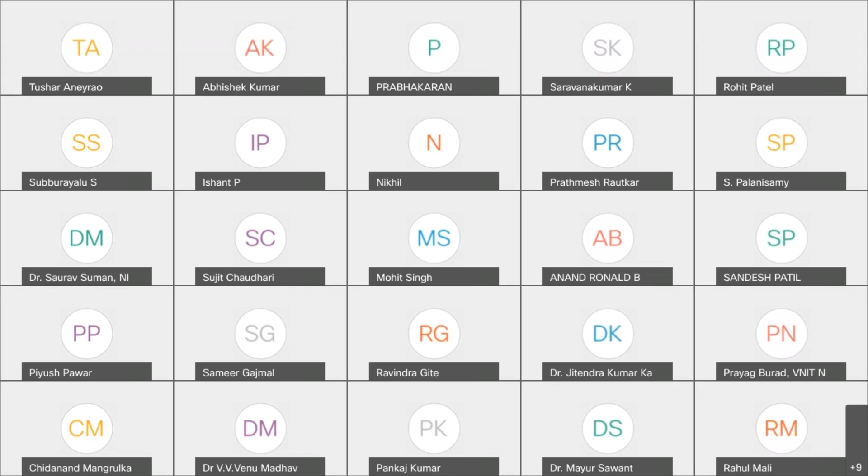Hello Rahul, I am audible. Yes sir. Actually, your voice is very low, so I thought that somebody is talking. Earlier, some voice was coming. Okay sir, so can I start? Yes sir, please sir. Okay, just give me 1 minute, I am sharing my slides. Yeah, my slides are visible to all of you. Yes sir, it is visible. And my voice is audible to all. Yes sir. Okay.

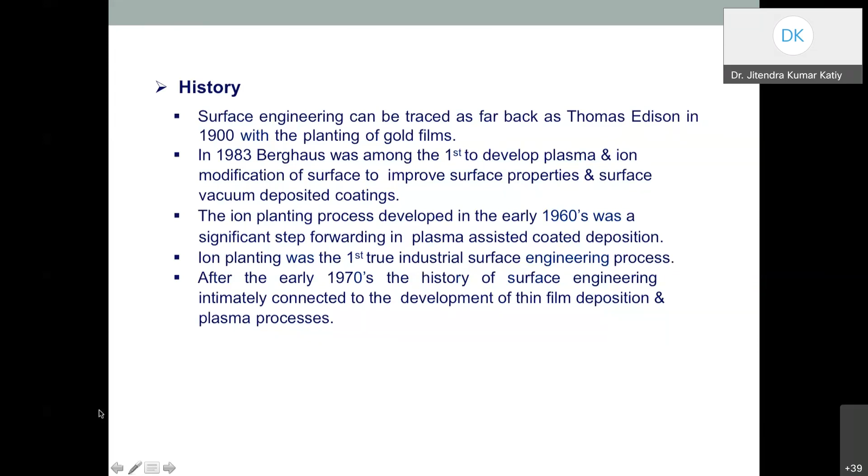This means when you do the painting on your door, what you will do first is coat the primer so that it can protect from corrosion, and then you can coat the paint. So the life of the paint will be increased after using the primer. That is also surface engineering—you have performed this in surface engineering.

So it is a sub-discipline of material science that deals with the surface of solid materials, and those solid materials compose the bulk material, and the surface is bound. This bulk material is called the surface phases. Different phases occur in that particular material.

Surface engineering means you alter the property of the surface in order to reduce the degradation over time. So it depends how you can perform it, like through heat treatment. You harden the surface, meaning you engineer it so that it will not degrade over a particular time period, improving its existence.

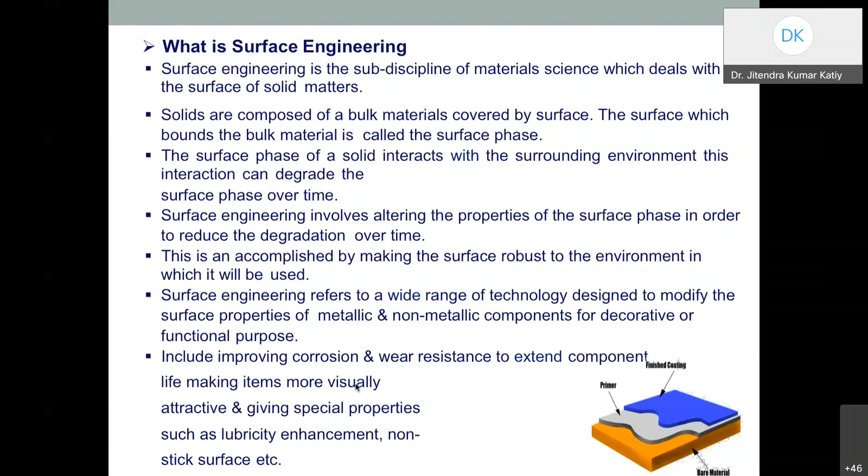Surface engineering refers to a wide range of technology designed to modify the surface property either by metallic means or non-metallic means on different components. Whatever the component—turbine blades, cutting tools, anything—surface engineering is important in all aspects. It improves corrosion resistance, wear resistance, life of the component, aesthetic appearance, and wettability. That's why surface engineering is important in all fields of mechanical engineering.

These are various examples of how we perform surface engineering, even metal additive manufacturing is a sub part of surface engineering. We coat a few microns of thickness over any component using a laser beam or electron beam as a source of energy to deposit material over the surface. If we use plasma, that's a plasma deposition process; if laser, a laser deposition process; if electron beam, an electron beam deposition process; or ion beam, an ion beam deposition process, which is used for nanoscale purposes. Here we work in combination with chemistry, physics, and mechanical engineering aspects, along with metallurgical or material science aspects.

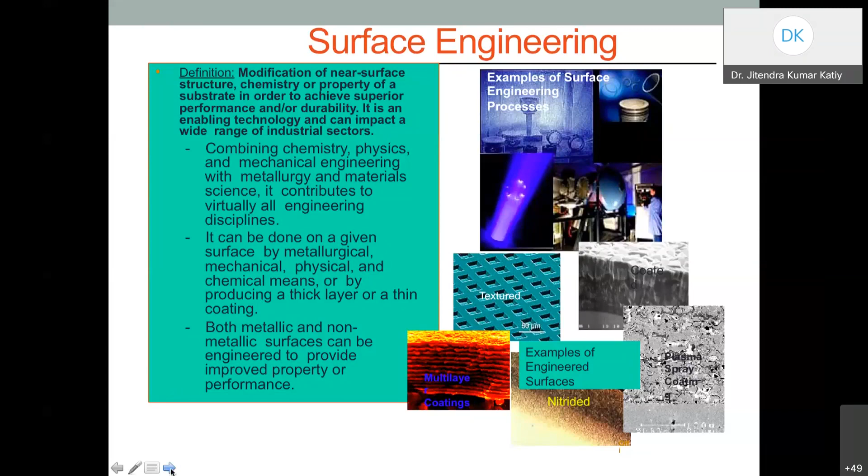Why is surface engineering important in manufacturing? An engineering component usually fails when its surface cannot adequately withstand external forces or the environment to which it is subjected. So the selection of surface material with appropriate thermal, optical, magnetic, or electrical properties and sufficient resistance to wear, corrosion, and degradation is crucial to its functionality. This may not be possible with the base material alone, so we perform surface engineering by surface coating, either by additive means or otherwise.

Additive is nothing but when you add something to the surface. Surface engineering provides additional functionality to the solid surface, covering all these aspects with the help of coating, or sometimes you functionalize and activate the surface, and also perform plasma treatment over the surface. That's why surface engineering is important to improve wear resistance, corrosion resistance, degradation property, electrical property, magnetic property, optical property, and thermal property.

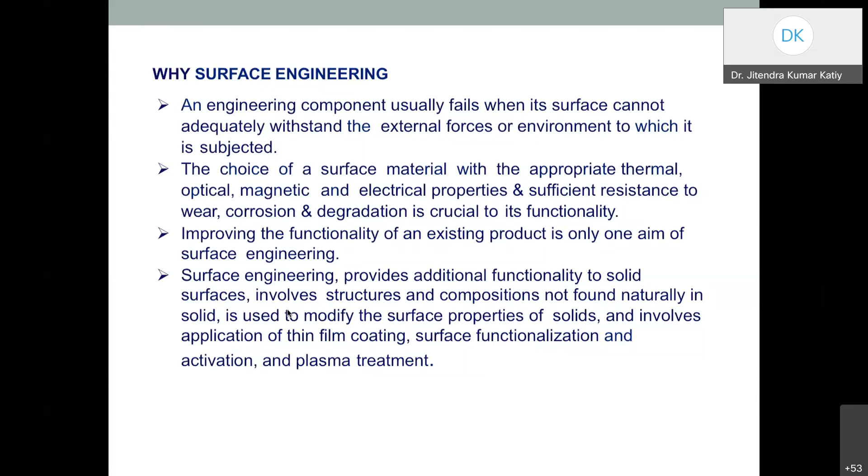So what are the benefits of the surface engineering we are using? The benefits are we can improve their frictional resistance property, wear resistance property, fatigue property, corrosive property, reflectivity, emissivity of any surface. When we do additive manufacturing, emissivity of the material is very, very important, so it should not be more, it should not be low. Also thermal and electrical conductivity, biocompatibility.

So when we use this surface engineering, we can improve the life of the component, improve wear resistance, oxidation resistance, corrosion resistance, improve their solderability, improve their electrical conductivity, improve their durability, so that we can produce very less waste. And surface engineered automotive parts and components can extend the warranty and reduce the emissions.

So we can also coat surface engineered valves, so they can withstand for 5 to 10 years without replacement.

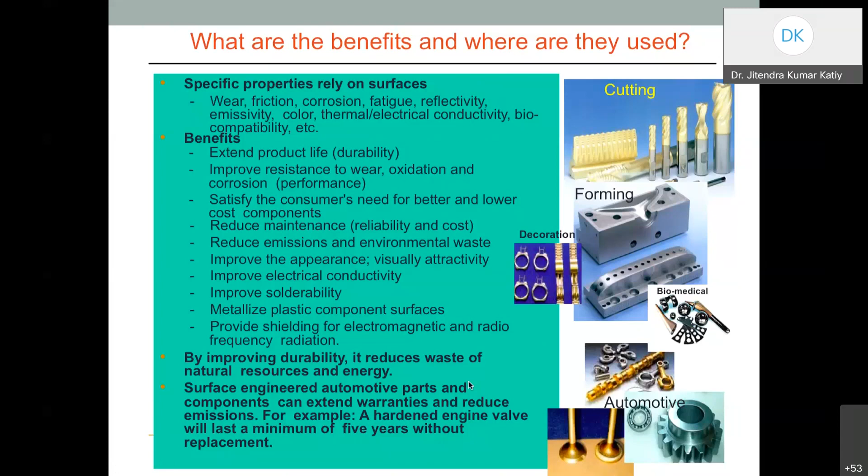So it is a very wide scope in the mechanical field. So how do you choose the correct things?

So first we identify the failure of an engineering component - when its surface cannot adequately withstand the external forces. And what is the environmental condition in which that particular component is used? And what are the loads that component occurs? So due to which type of failure is observed over the component. So first thing, you identify the failure mechanism.

Then only choose the correct surface engineering method. Then, what type of external forces - thermal, optical, magnetic forces, thermal forces, optical forces, electrical forces - these are the external forces. Sometimes it requires surface modification, sometimes we don't require further modification.

Then we can modify the surface with some other means, like we just do PVD coating, physical vapor deposition, or chemical vapor deposition.

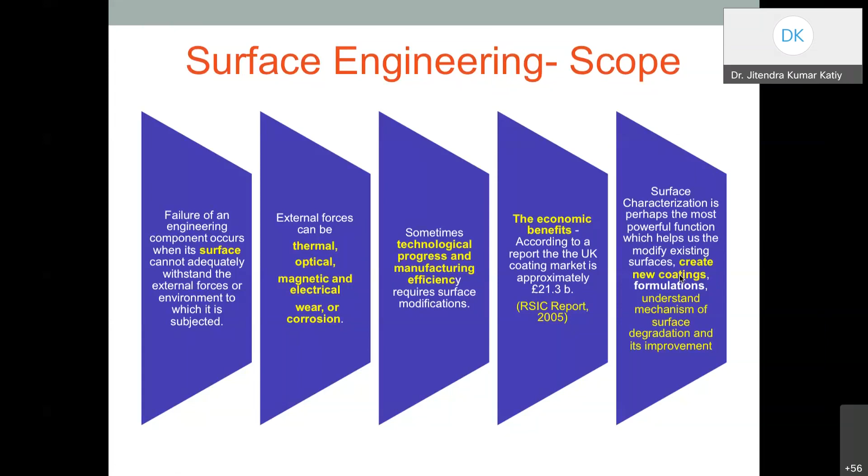So surface modification is done without changing the material chemically. That is very important - we are not disturbing the chemical, meaning the substrate. We are not disturbing the material property of the substrate. We are only altering the top surface of the substrate.

So there are three types of processes which we use: thermal processes. In thermal process, we can go for the surface heat treatment process.

So we can go for surface heat treatment processes like hardening, nitriding - those are one process. And when we talk about steel or cast iron alloy, low carbon alloy, we want to harden the surface by laser cladding, by laser flames, or induction. So if we are using laser as a source, then we can go for sub classifications such as laser cladding - that is also one type. Selective laser sintering. Like if you are using flame...

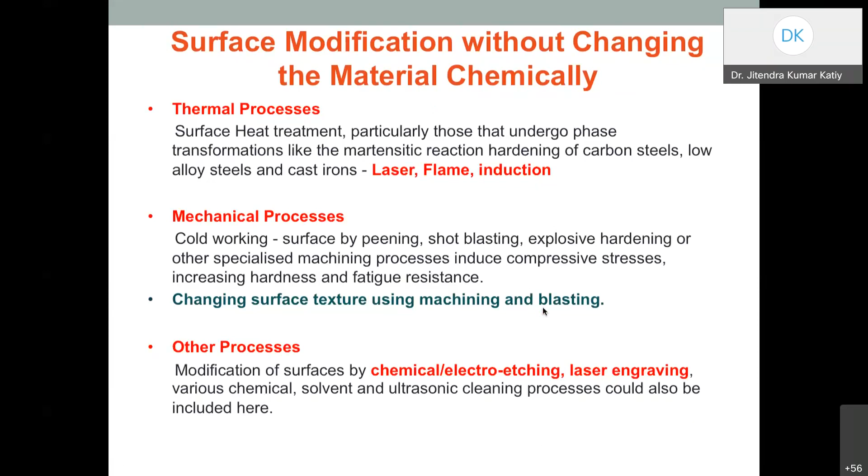Here we are not changing the material chemically - that is the important point in surface modification. So surface modification is achieved by changing the surface chemistry only. On top of the surface, we only play the role - we are not going inside; the substrate properties remain similar, but we change the surface property.

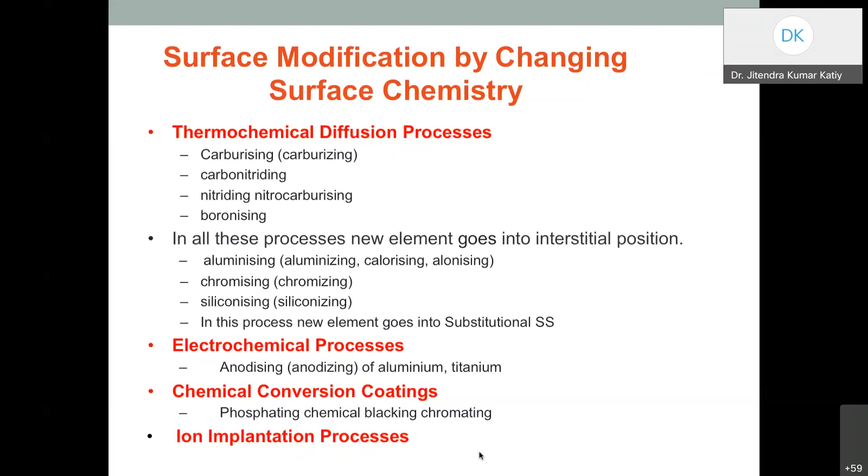Diffusing processes like carbonitriding, nitriding, boronizing, carburizing are various thermochemical processes. Other new elements go into the substitutional positions, like chromizing, siliconizing, and aluminizing. We impinge the foreign particle inside the material, which is also used in semiconductor applications when using interstitial positions. Electrochemical processes like anodizing of aluminum and titanium, chemical conversion coatings, phosphate, chemical blacking, chromating, and ion implantation are various methods used for surface modification by changing surface chemistry, not material chemistry.

In surface engineering, there are a few steps. First, surface modification is done without changing the material chemically. Surface modification is done by altering the surface chemistry only. And surface modification is done by adding new material onto the surface, such as coating, laser cladding, or additive manufacturing. You add material over the surface to improve properties like wear resistance, corrosion resistance, mechanical strength, and impact strength, for example on turbine shafts and blades. So these are the three basic phenomena used to perform surface engineering: adding new material, altering surface chemistry, or modifying without changing the material chemistry.

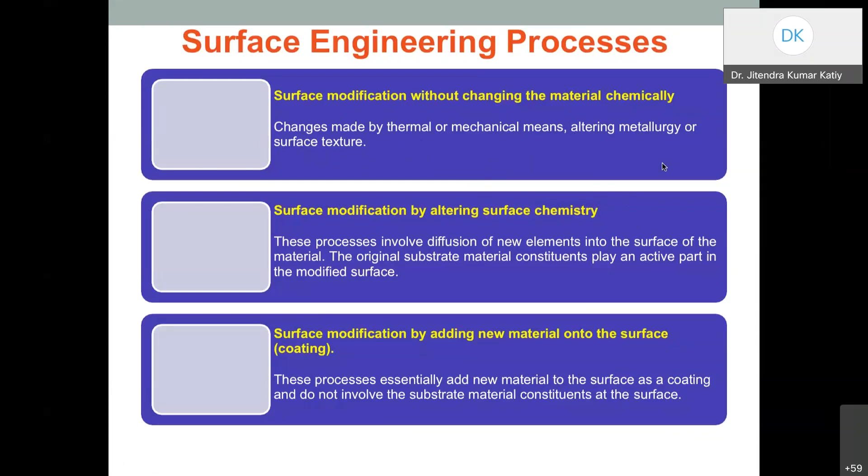Evolution and significance of surface engineering is very important nowadays, in architecture, coating aspects, automotive industries, gear industries, nanomaterials, nanotexturing, and nanostructure development.

Hello. Yeah. Okay, can you call me after one hour because I'm taking lunch? Okay, please call me after one hour.

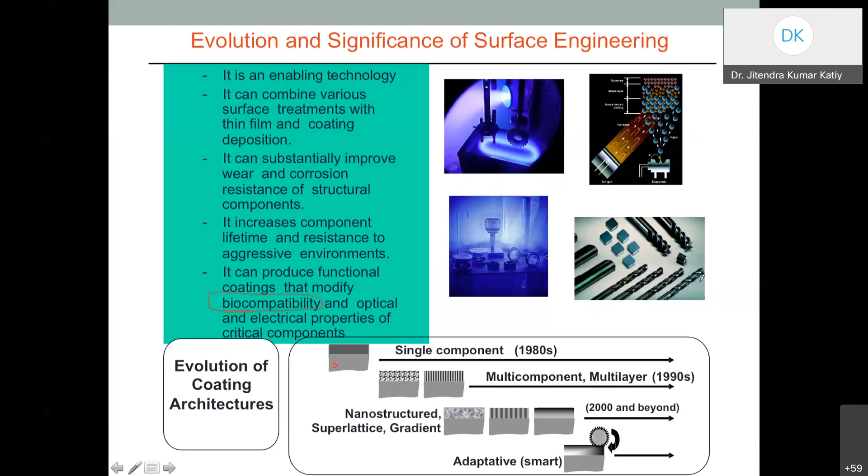So this is the basic overview of surface engineering. Either you can do coating or modify the surface, as per requirement. This is a very important slide to understand. What is the meaning of surface engineering? You can easily correlate it with research, as many researchers discuss their research in this context, and this slide gives you a basic understanding of that research very easily.

Here you can see surface modification. It can be done by thermal aspects only, using thermal energy for surface hardening processes, such as flame hardening, induction hardening, electron beam hardening, or laser beam hardening. Here we are focusing on thermal aspects, where temperature plays a very important role in modifying the surface.

Further, surface modification can involve both thermal and chemical aspects, where temperature and chemistry both play important roles. This includes diffusion of non-metallic elements like carburizing, nitriding, carbonitriding, and boriding, where carbides or nitrides are diffused over the surface to enhance hardness or corrosion resistance. Sometimes surface modification is done by mechanical means like shot peening, laser peening, or surface texturing to enhance hardness and fatigue properties. That is one part of surface engineering.

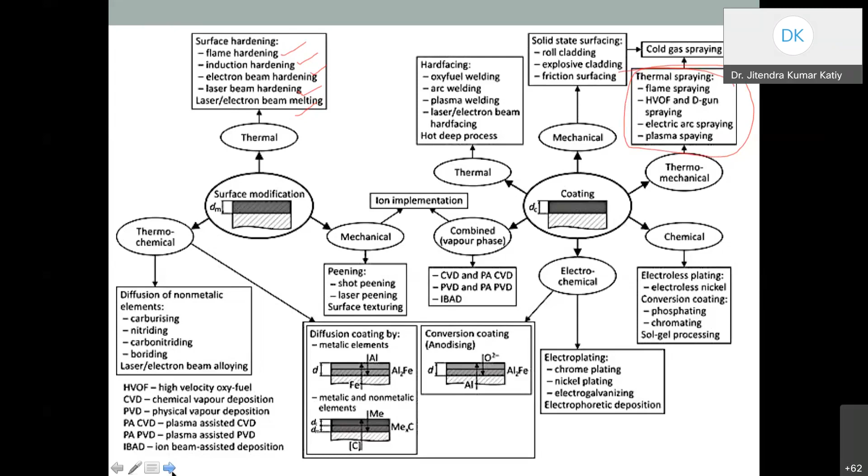So these are the different phenomena which we use to enhance the life of the component in terms of their wear resistance property, corrosive resistance property, durability, and mechanical property. That's why it is very, very important. So our main focus in additive manufacturing is to enhance the life using these processes. I hope everyone can correlate their research work, whatever you have listened to till today, with this slide.

So material property, as I told you, is very important. Bulk properties - strength, density, ductility - these do not change, but surface property plays a very important role. So hardness, friction, corrosion, oxidation - these are called surface properties. Bulk properties are strength, density, ductility - these are called the bulk mechanical material properties. Surface property means hardness, friction is a surface property.

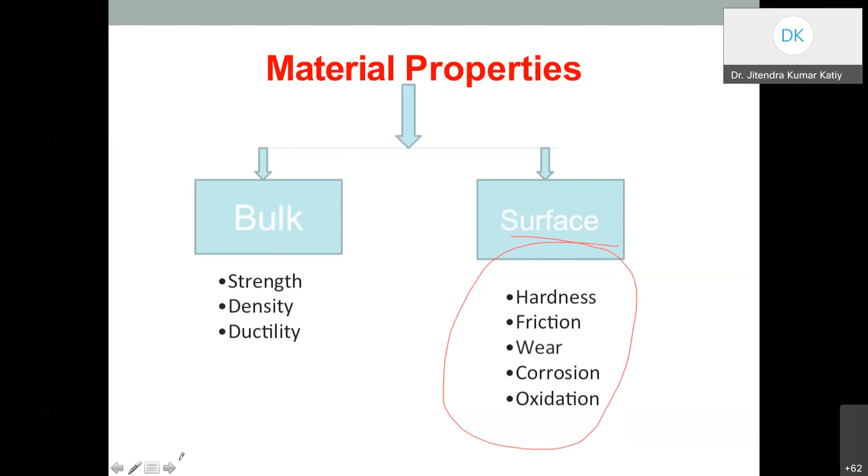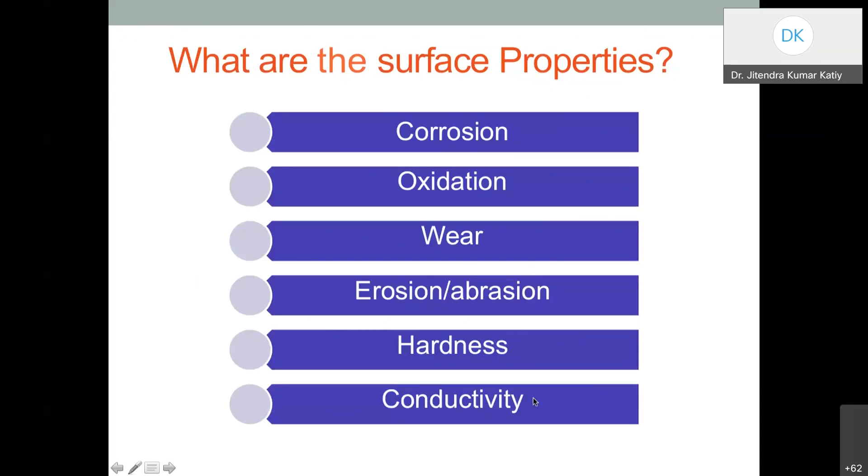Wear is also a surface property. Corrosion is a surface property. Oxidation is a surface property. So we are only playing with these surface properties to enhance the life of the component. So what are the surface properties - corrosion, oxidation, wear, erosion, hardness, conductivity, emissivity? These all are surface properties.

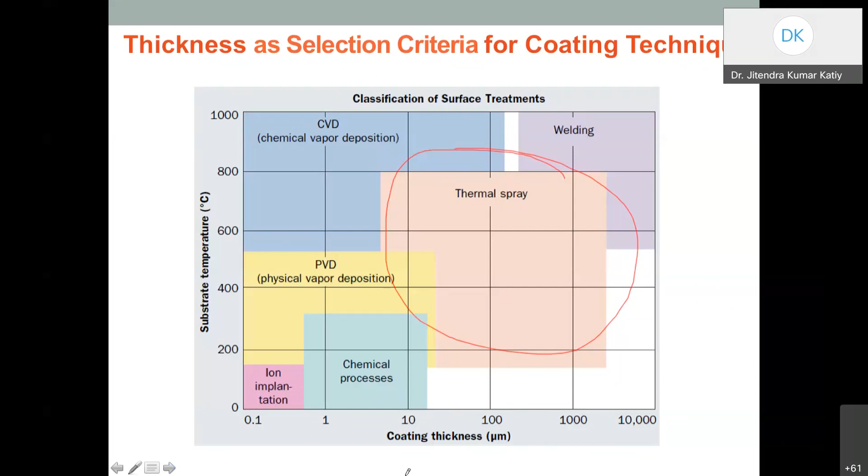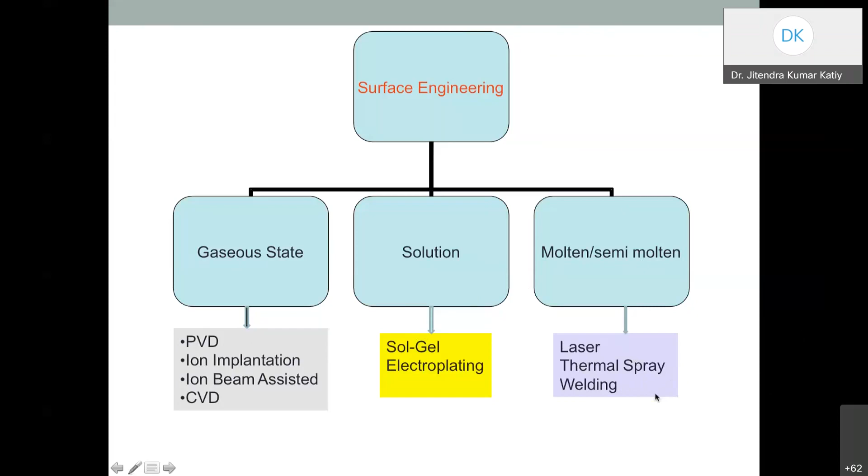So surface engineering gives you, we can either perform in the gaseous state, or in the solution state, or in the molten or semi-molten state. In the gaseous state, we work with physical vapor deposition and chemical vapor deposition, where material is evaporated and deposited onto the substrate. In the solution based approach, like sol gel or electroplating, we dip two rods - one which we want to coat and one which we want to evaporate the material from - and coating occurs. So we need the electrolytic solutions. For molten and semi-molten material, we need power - so laser, thermal spray, or welding. We just melt the material and that diffuses over the surface. So that is the molten or semi-molten state.

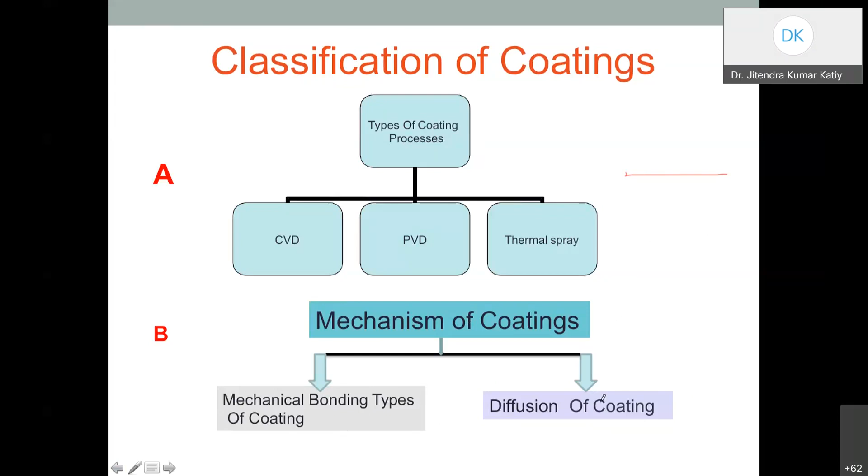So classification of coating is basically three types: chemical vapor deposition, physical vapor deposition, or thermal spray coating. The basic mechanism of the coating performed over any surface is either mechanical bonding with each other, or diffusion. So in laser cladding, what do you do? We diffuse the powder over the surface. Diffusion occurs due to the high temperature of the laser source, which diffuses the material into the substrate. If this is the substrate, the material is diffused into it and forms a coating. So these are the two mechanisms - either diffusion process or mechanical bonding process.

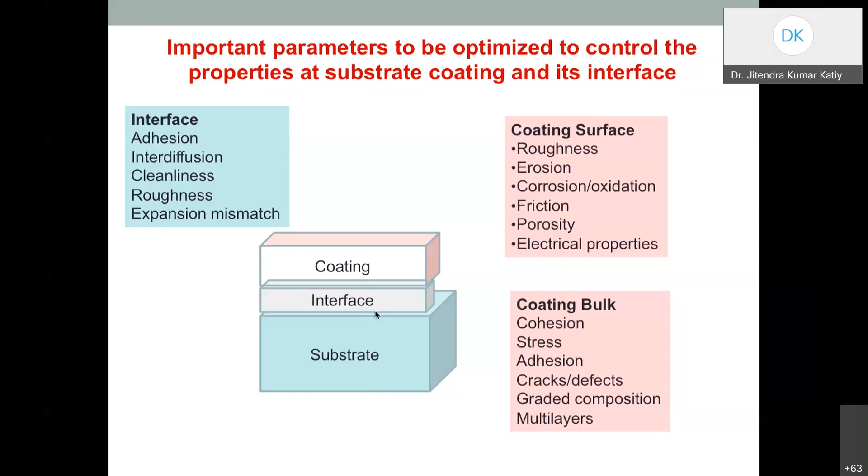It is very important to optimize these when you perform any type of surface engineering problem. The surface property improvement triangle consists of surface modification techniques, functional properties, and characterization. In this way, we can optimize the parameters by hit and trial method, and use the optimum parameters for particular applications.

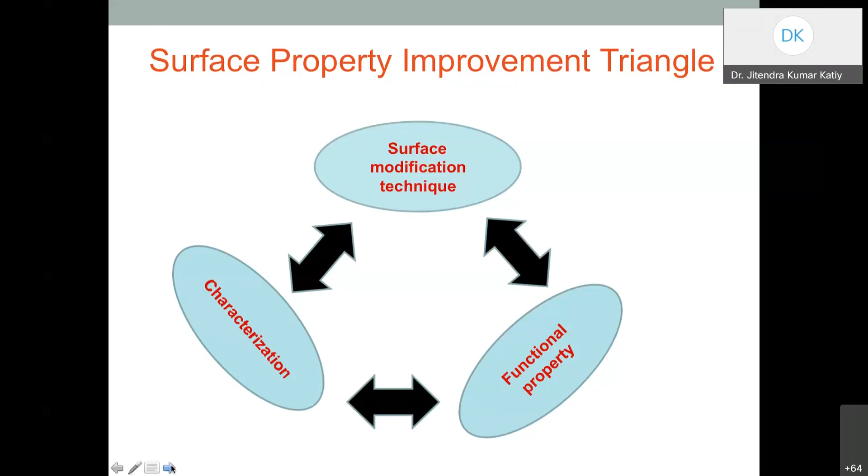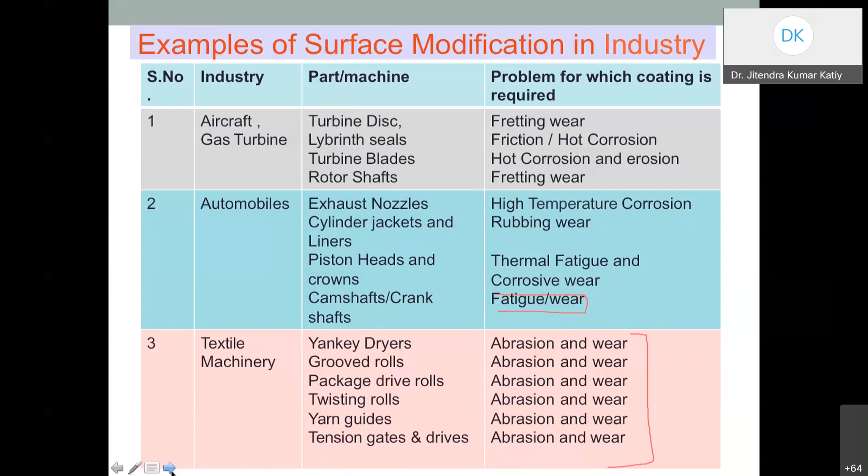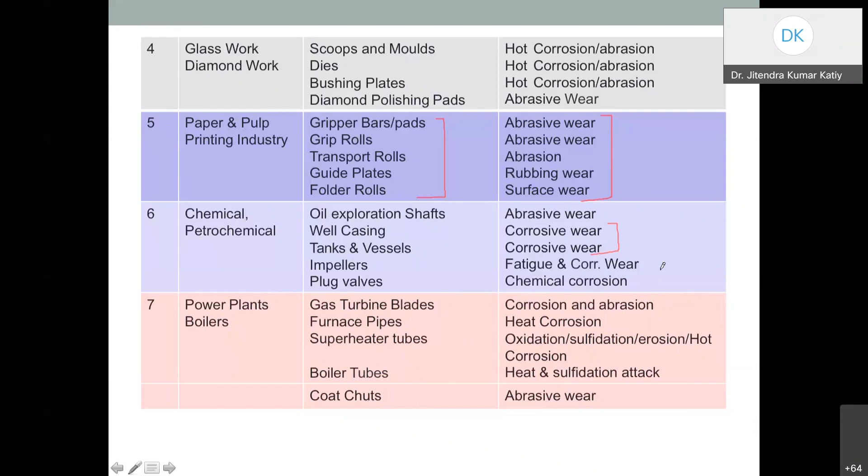So in all industries, surface engineering plays a very important role to reduce the maintenance cost of components. If a shutdown occurs even once, there is huge loss in that industry. That's why surface engineering, or additive manufacturing, is very important in these industries.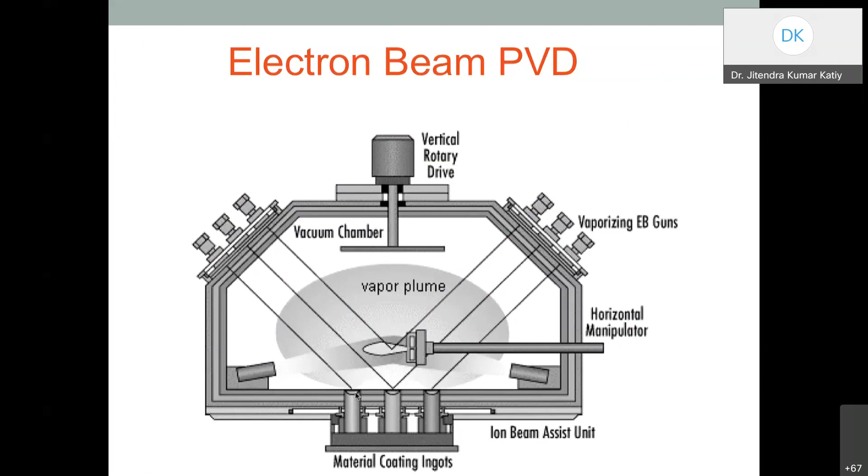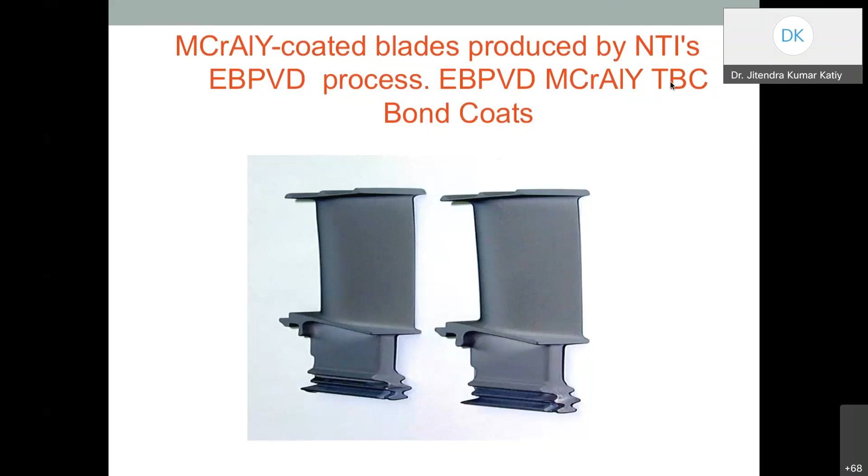Another type of coating very predominant in real estate is called hydrophobic coating. A beautiful example is the lotus leaf, where if you drop water on it, it rolls out. In real estate, there are multi-story buildings, and it's not possible to clean the glasses very frequently. So you coat the hydrophobic material over the glass, so that even dust particles roll out. This is known as the self-cleaning property.

So you are enhancing the self-cleaning property of any material. This is also used in textile industries, where they are working on self-cleaning cloths, so that dust particles will not stick to your cloth. That is also available in the market, but it is too costly. The dust particle will come and roll out. This is a very important research area where nowadays most researchers are focusing.

This can be performed either by plasma assisted chemical vapor deposition. Here you can see the example, the water forms at least a 150-degree angle. That is a super hydrophobic surface.

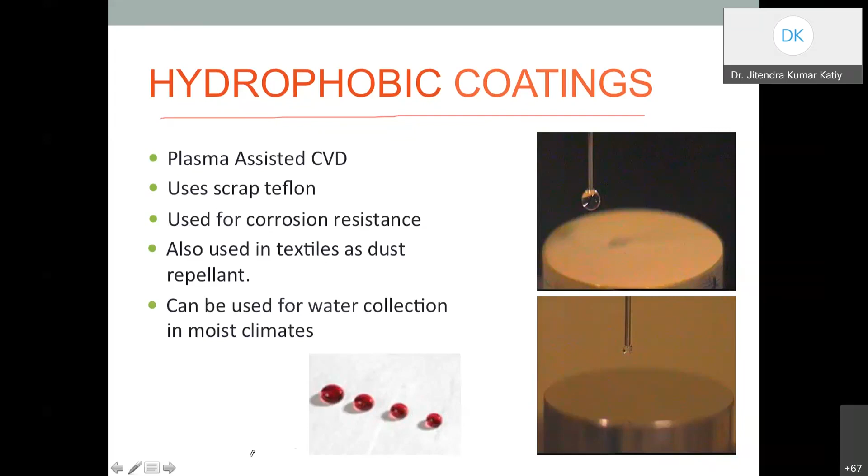Another kind of surface engineering is plasma etching. This process is performed on any substrate to improve their adhesive property. Plasma etching improves the adhesion property of any substrate, and it can cleanse and activate the surface and reduce toxic chemicals from the surface. One example is plasma etching of automotive parts, which can improve the paintability and service life of the component. It has wide applications on materials ranging from metal to polymer.

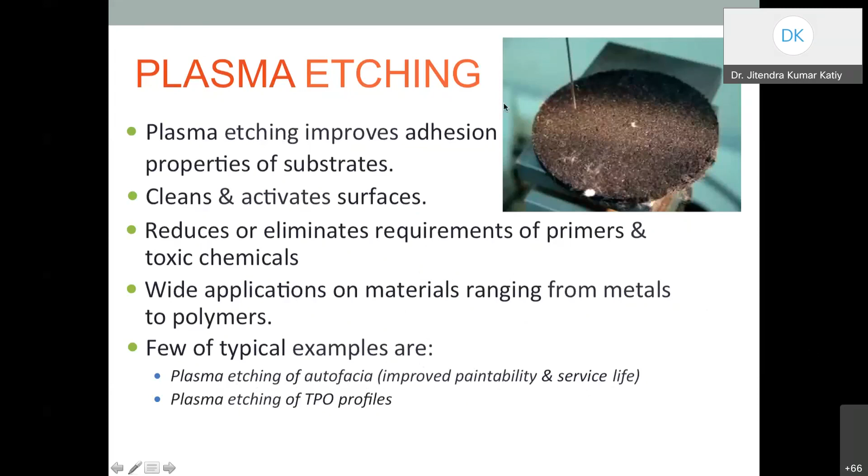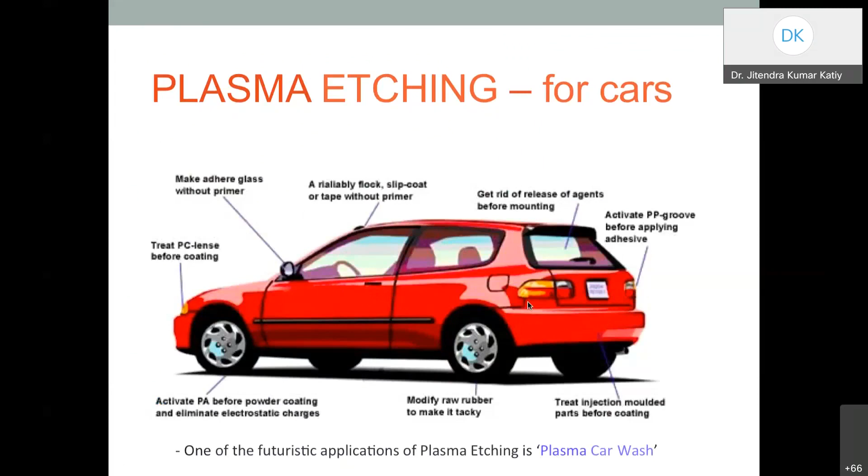For plasma etching of cars, your whole body goes inside the plasma, and you can clean the surface with the plasma etching process. You get a shiny surface after completing this chamber process. This is widely used in the automobile industry.

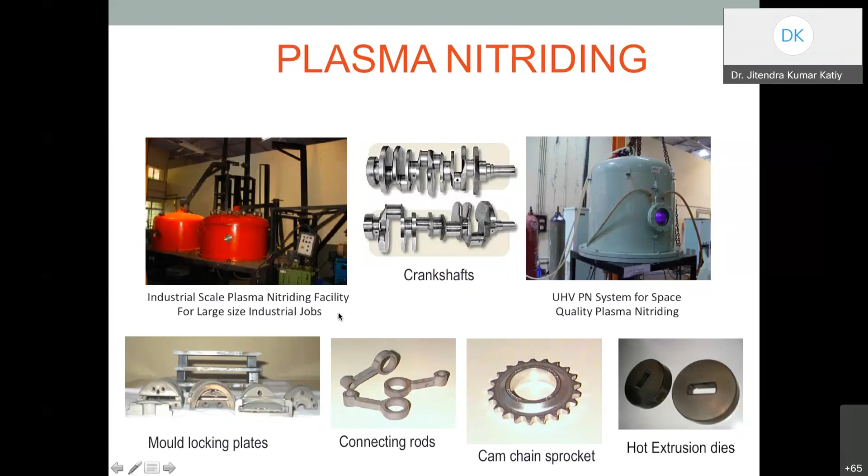Another kind of surface engineering process is plasma nitriding. Here you can see industrial scale plasma nitriding facilities, with very big vacuum chambers where we can coat the material in presence of plasma, which is the fourth state of matter. It can deposit over the surface to improve corrosive and wear properties. Applications include connecting rods, crankshafts, hot extrusion dies, and mold locking plates.

That is called the thermal or plasma spray process. Here you can provide a very thick coating, at least 20 microns, on a very large scale, in the form of alloy, ceramics, plastic, or composite, as per our application requirements.

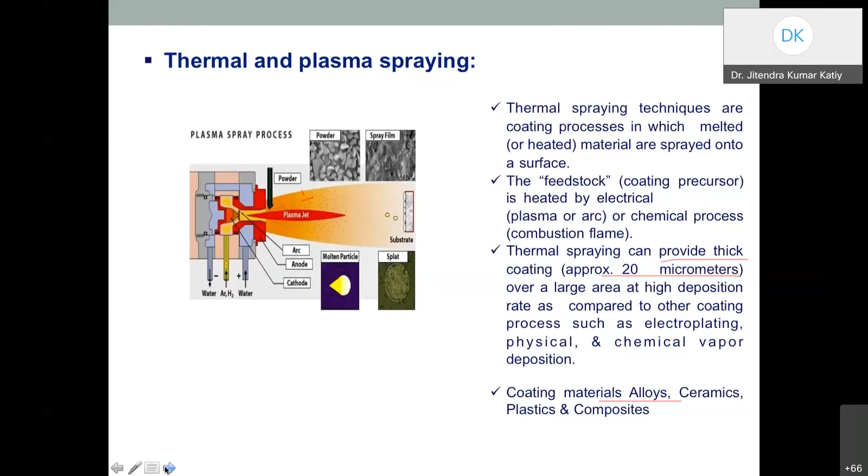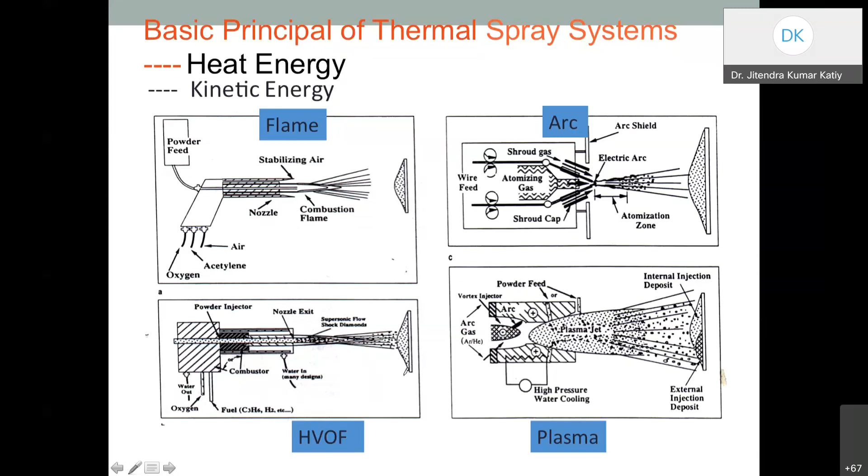Here we have the plasma jet with a powder feeder, and whatever gas comes out converts into the plasma jet and deposits over the surface. So in HVOF and other processes, the powder feeder is very important, with the nozzle and gas coming out. Laser cladding can also be performed by this process.

This is a comparison of various thermal spray processes as per our application requirements, so we can select the accurate process for various applications. Cold spray is also used nowadays to improve life, along with air plasma, vacuum plasma, and wire arc. This table is a well-established comparison between the different processes.

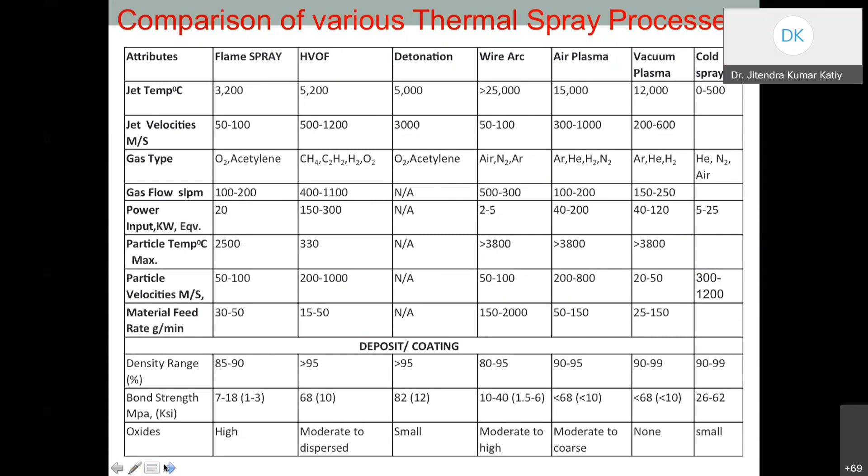When we move to advanced coating technologies, these are called nanoscale technologies, like physical vapor deposition, where you have the base material and the substrate material. Whichever substrate you want to coat, you keep it inside this crucible and heat it up. Due to the heat, the material converts into a molten stage and vaporizes, and it coats over the substrate.

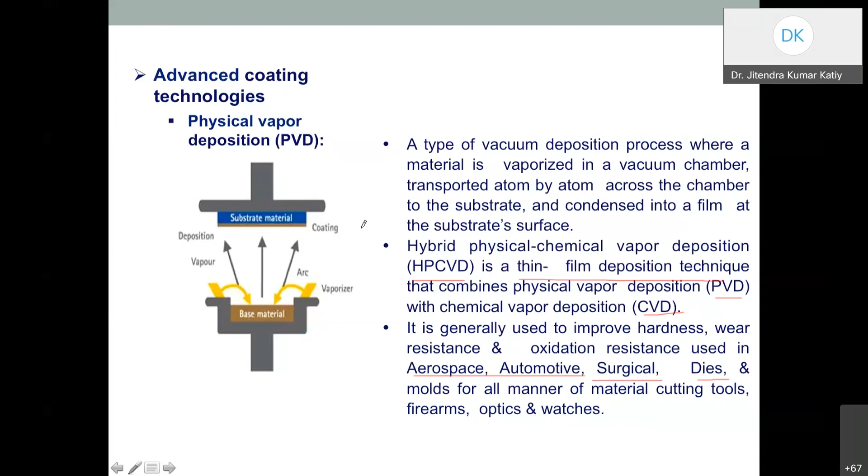In this way we have hybridized this surface, utilizing the properties of both physical vapor deposition and chemical vapor deposition. So we can say this is a hybrid physiochemical vapor deposition process to deposit the thin film. These advanced coating technologies are used in aerospace and automotive, surgical equipment, dies and molds for material cutting tools, firearms, optics and watches. This hybrid phenomenon is widely used nowadays, and the whole process is performed in a vacuum chamber.

Further enhancing physical vapor deposition, here you can see how heating is done by induction coils. We heat and deposit the film over the substrate, and we can see the AFM image showing that the thickness is approximately 4.8 nanometers. So a very thin surface can be adopted by this physical vapor deposition process.

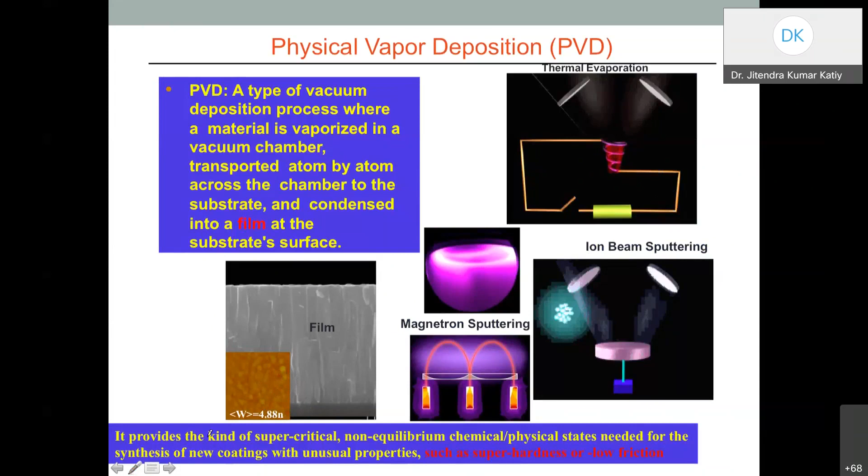Titanium nitride, zirconium nitride, chromium nitride can all be physically vapor deposited over any substrate. This technology is also widely used in food packaging, balloons, coating for cutting tools, metalworking, mechanical engineering, and in semiconductor industries for the metallization process to create ICs. So physical vapor deposition is widely used.

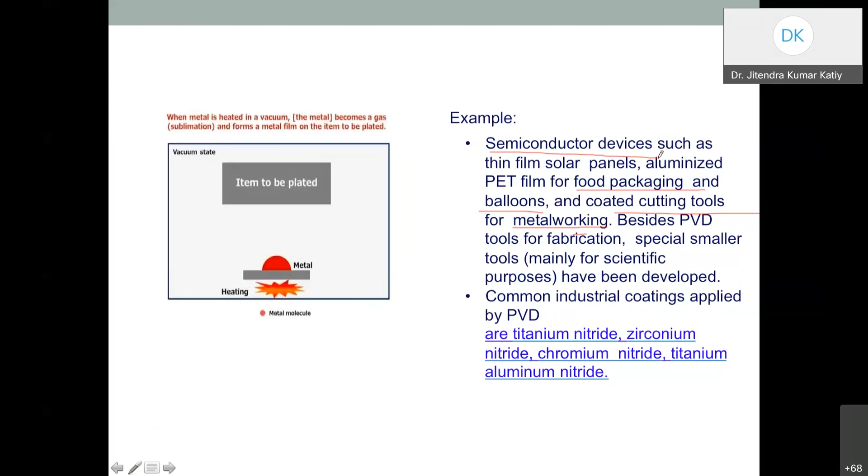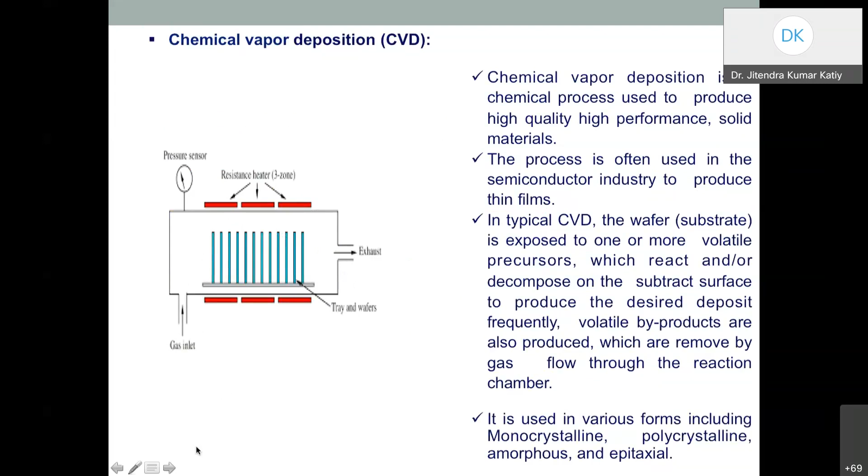Chemical vapor deposition uses gas precursors, so you can develop silicon oxide over the surface. The precursor gas is deposited over the substrate, which has a heater, and the precursor gas is exhausted at one side. In this way, we can create monocrystalline, polycrystalline, amorphous, or epitaxial material by chemical vapor deposition to improve their life.

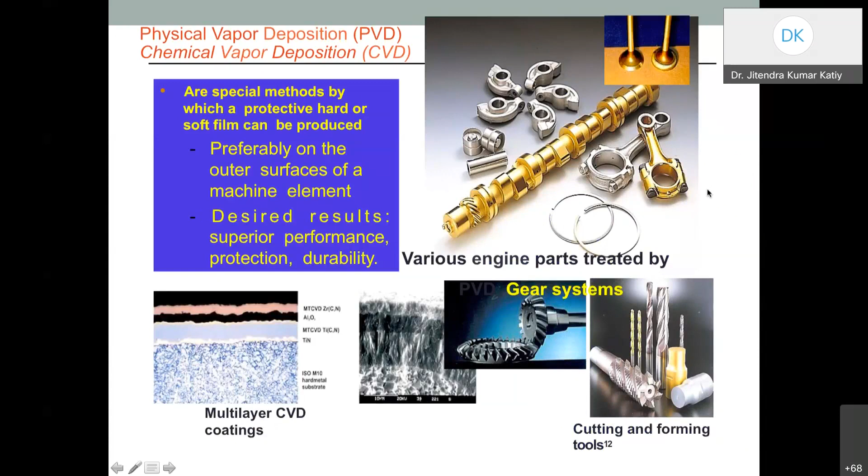These applications are widely used in automotive industries, gear industries, and cutting manufacturing industries to improve the life of the component. These are further examples in terms of products, such as gears, showing how important CVD or PVD coating is in automobile and other industries. Even in hard disks, coating is performed by physical vapor deposition, with a coating thickness of 10 nanometers.

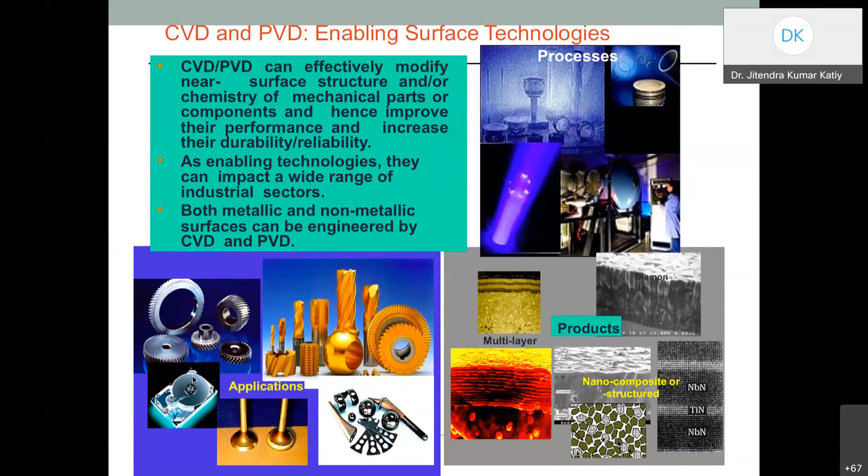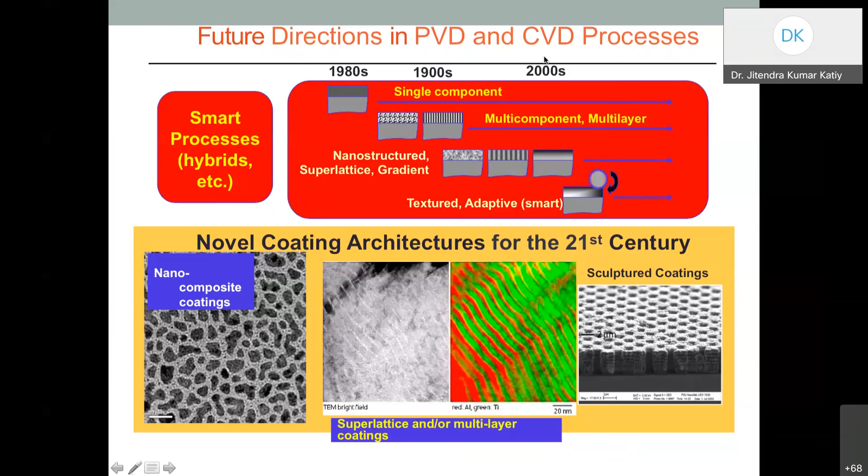So the future direction of PVD and CVD coating is like this: you can see nano composite coatings we can develop. These are novel coatings being developed in the 21st century, such as sponge type coatings and sculptured coatings where we have some porosity in the coating. This type of textured surface allows multi-layer coating to be performed, developing structures over the surface to improve the life of the component. These are the future directions in PVD and CVD coatings.

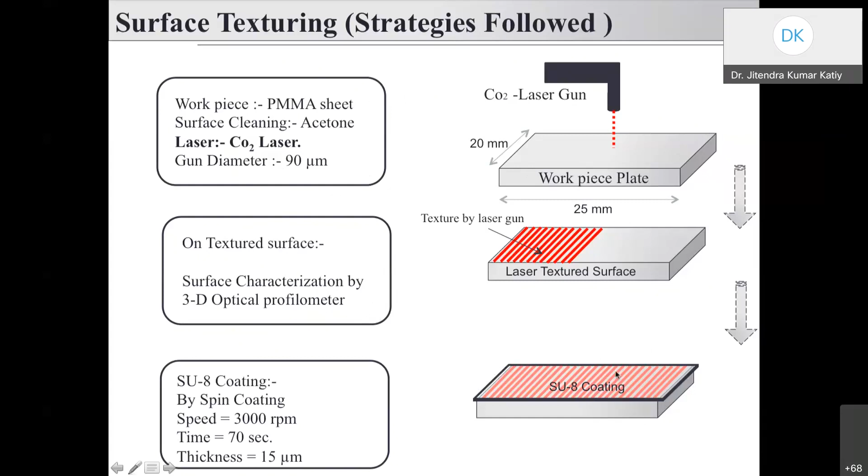Now I will show you one example of surface texturing and how it improves the life of the surface. Here we have the workpiece, and we use CO2 laser guns to perform the texturing over the surface, using a gun diameter of 90 microns. We perform surface characterization using a 3D optical profilometer, then coat the substrate with SU8 polymer and perform tribological tests.

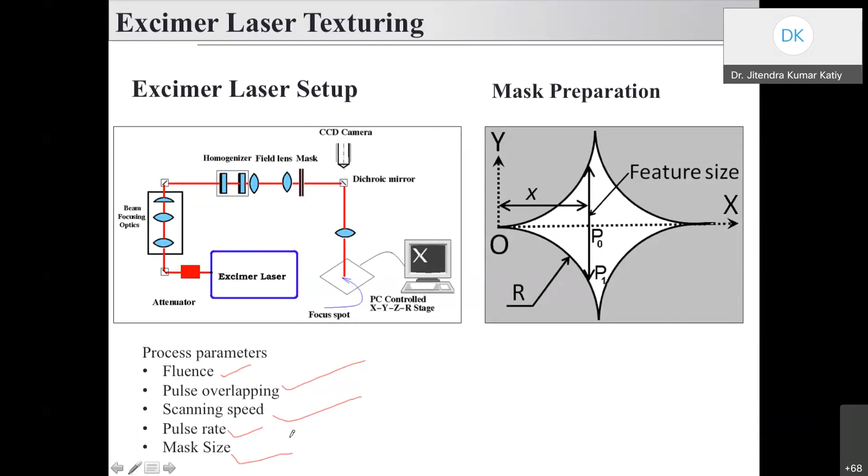For texturing purposes, we use a mask, which is very important, along with other parameters like fluence, pulse, scanning speed, pulse rate, and size of the mask to get proper textures over the surface. The 3D optical profilometer shows how we can beautifully develop these textures over the silicon wafer, which we then coat with polymer material to improve their life. The pillar heights observed are 20 to 22 microns, and the distance between two pillars is 200 microns, easily visible through this texturing.

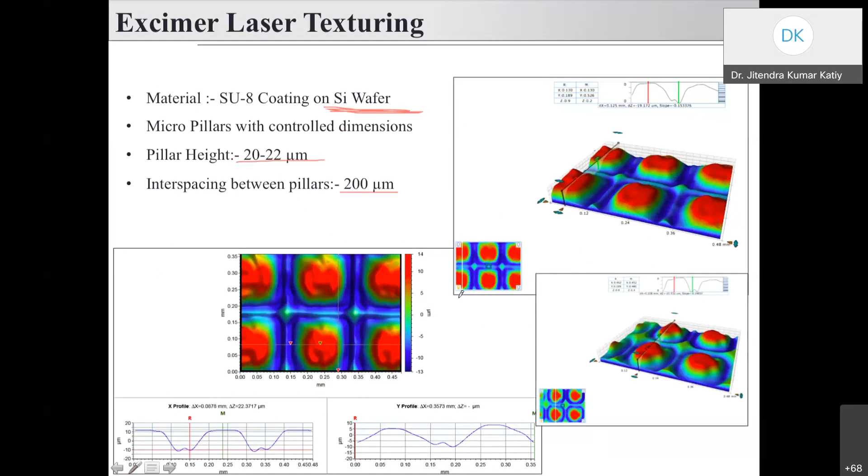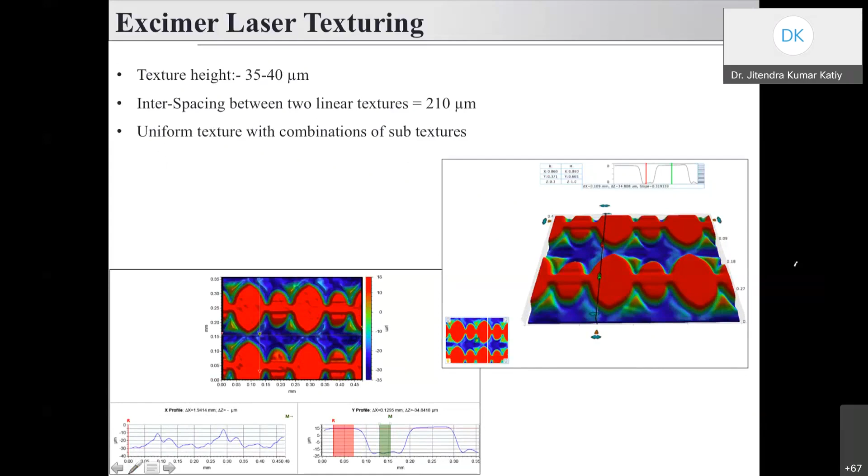Another beautiful thing about this texturing is what we observe in the SEM, which is very important. Uniform textures combined with subtextures are observed in this particular texturing, and this is a shark type phenomenon. You can see the very beautiful shark image, where the shark skin surfaces look like that. The textures we developed are beautifully covered with this shark skin, which can reduce friction and wear in an excellent manner.

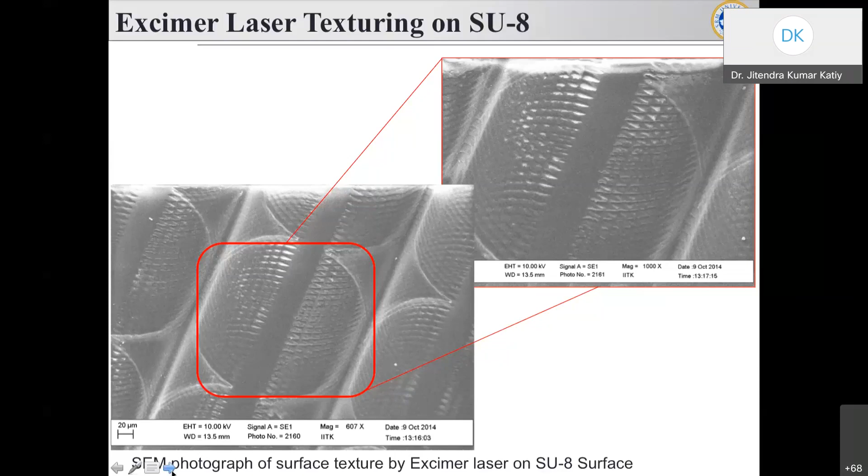So this surface texturing engineers the SU8 surface into a shark skin by playing with laser power and other parameters. That is one example of surface engineering. Now we can move to nanotechnology, where ion implantation is very important.

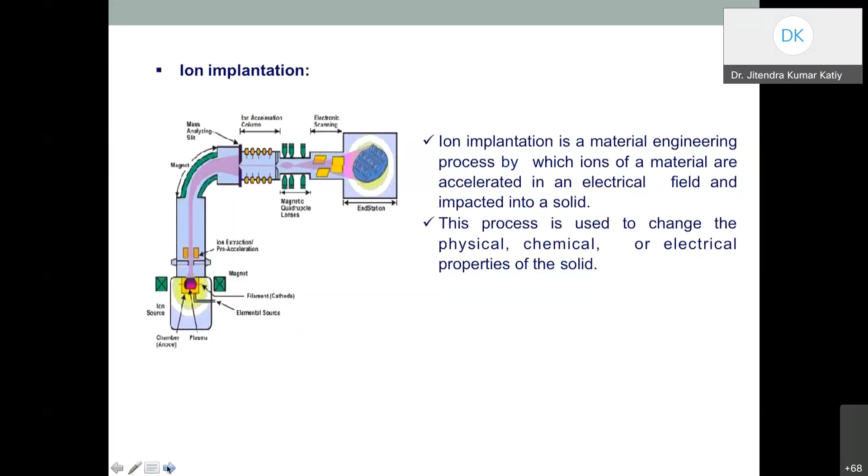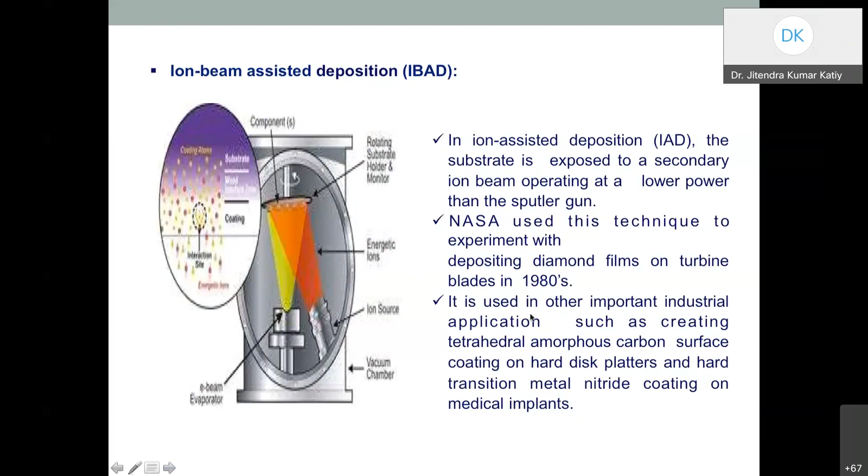So it means diffusion of some species inside the silicon wafer. So ion implantation is used. It is widely used in semiconductor industries to improve their electrical, chemical, or physical properties. Ion beam assisted deposition is where you have the electrode, and that electrode is deposited due to high ions deposited over the surface. That is called the ion beam assisted deposition process, through which you can develop the nanostructure in semiconductor industries.

Another type of process used in additive manufacturing is laser cladding, also known as direct energy deposition. It is one of the most promising technologies in additive manufacturing. In this process, we use the laser beam as a source of energy, which fuses the powder with metallurgical means over the substrate. Due to this diffusion of the powder, a thin layer of powder is coated over the substrate. Due to the melting of the powder, we achieve good diffusion with good metallurgical bonding, very less dilution of added material and substrate, so that the original properties of the coating materials are maintained.

For better understanding of this process, there are two basic phenomena or issues developed when using the laser beam as a source: distortion and temperature. These are the two basic phenomena that are very predominant. How you can control these two phenomena is very important. I hope that will be discussed by some other speakers in this lab, so I am not going through it in detail. I just wanted to tell you these are the two basic phenomena important to control in additive laser cladding.

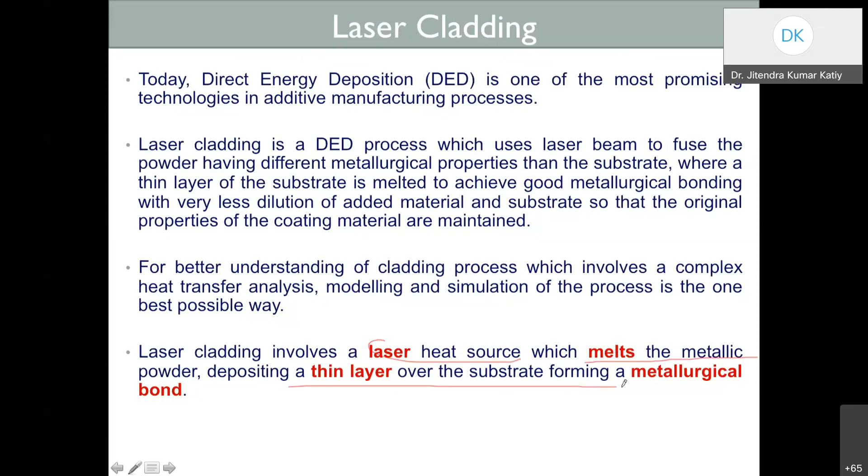Here you have the laser as a heat source, melting the material powder, depositing a thin layer on the substrate by metallurgical bond. This is the basic mechanism involved in laser cladding. Here you can clad layer by layer. This is the nozzle, the laser light is falling, and the powder is also coming out through the powder feeder, and it is deposited over the substrate. So one layer, another layer, another layer.

Another issue in metal additive manufacturing is how you can control the adhesion, how you can improve the adhesion between these two layers, and how you can reduce the porosity between two layers. That is another problem in laser cladding or any metal additive manufacturing. When we work on the research aspect, we properly optimize the parameters, and only then will we get better adhesion and less porosity between the layers.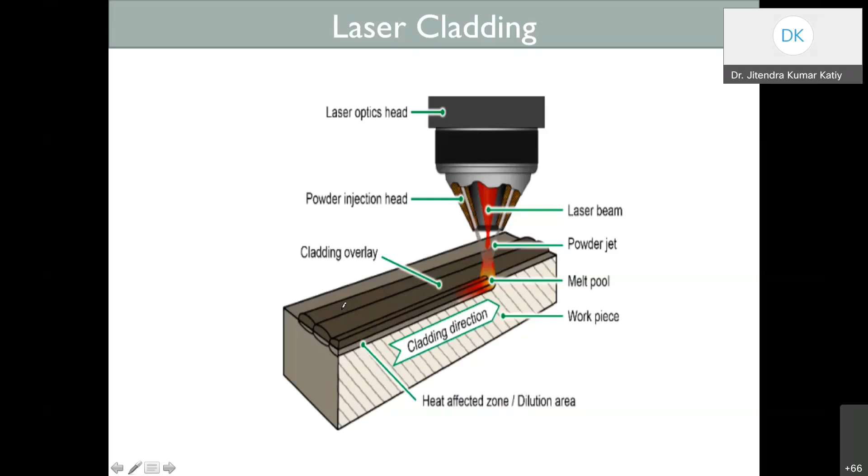These are various examples where turbine blades are completely eroded due to erosion, cavitation, damaged pumps, compressor turbines, and hydro turbines. The repair cost is sometimes very large, and due to the repair you have to shut down your production. That damages our society as well. If you shut down the production, you will not get any benefit, so that is also not feasible.

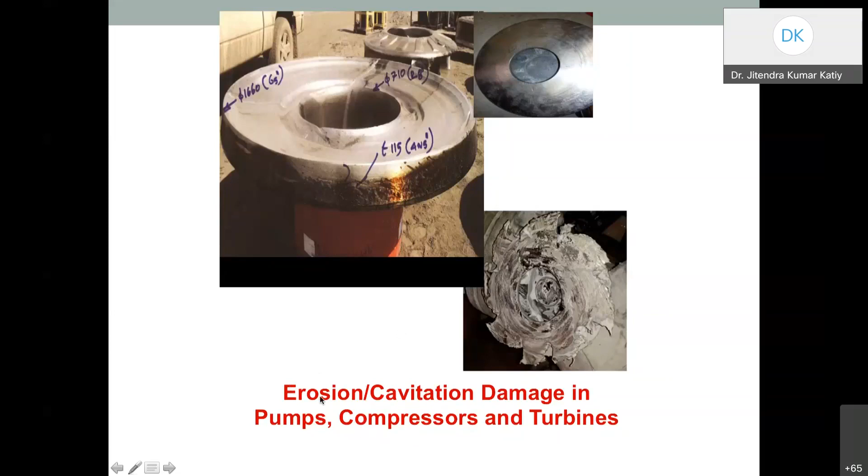So these are the various examples. That's why additive manufacturing, or surface engineering, is very important to improve their life for a longer time. If the turbine or blades wear out in 1 year, with surface engineering it will go up to 2 years. So that adds more value in terms of money. These are other examples.

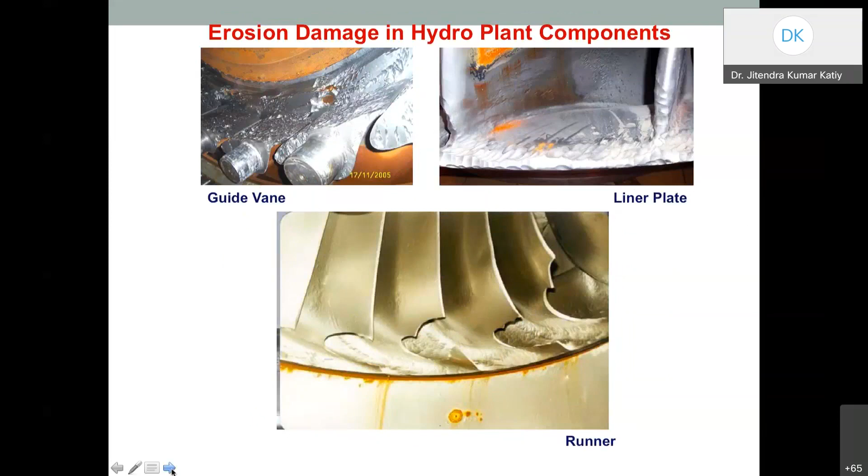The turbine blades and runner blades wear out due to cavitation. Guide vanes wear out due to corrosion, and on liner plates you can see that damage occurs over the surface. These things can be fixed by proper laser cladding or additive manufacturing. That is the application of additive manufacturing, and these are the pictures.

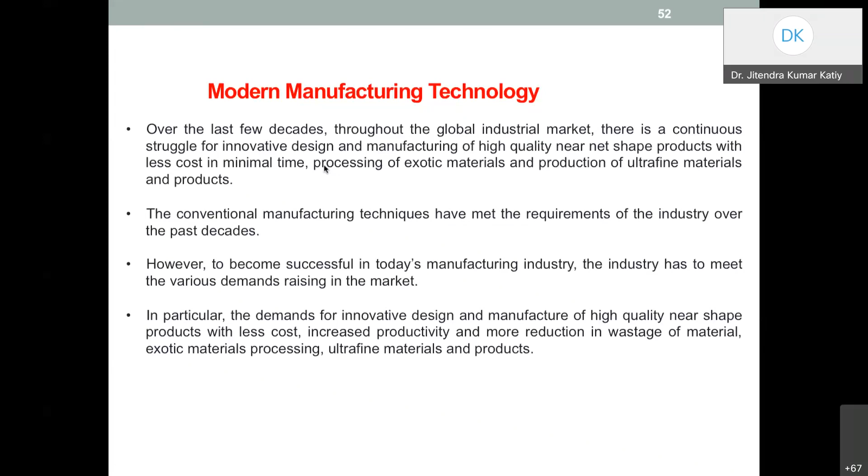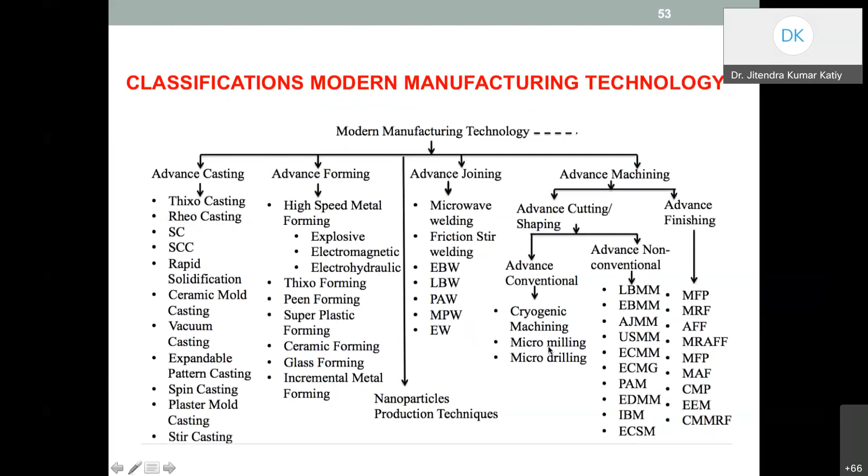That is also another task in the manufacturing industry, all covered in that particular book. As I told you, this modern manufacturing technology classification, which I made with some literature, includes advanced casting, advanced forming, advanced joining, and advanced machining. In advanced machining, we use advanced finishing, advanced cutting and shaping. These are the various modern manufacturing technologies which are used. Further, we can go for more on modern manufacturing.

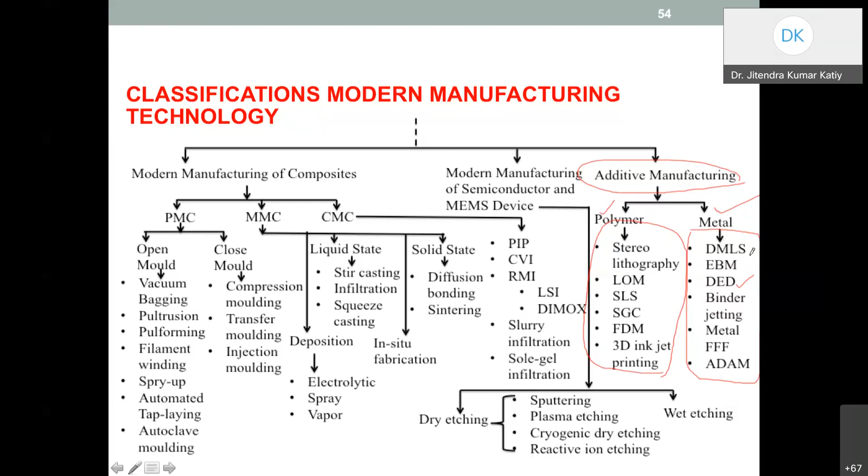This modern manufacturing for the semiconductor industries is related to additive manufacturing. There are two types: polymer based and metal based additive manufacturing. Polymer based additive manufacturing is more or less everywhere used in lab scale, using FDM process, 3D printing process, and lithography process. But our main focus is on metal additive manufacturing, which is the future of research, like electron beam melting, directed energy deposition like laser cladding, binder jetting, metal fuse deposition, and DMLS - direct metal laser sintering process. These are the various metal additive manufacturing techniques described in that particular book.